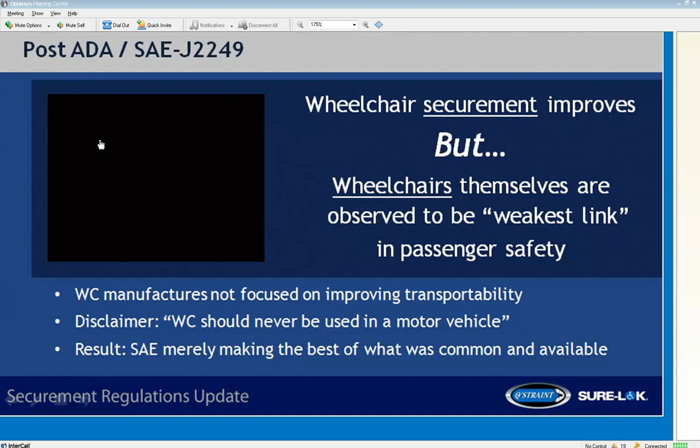So in essence, what you were doing after ADA and SAEJ 2249 is taking a strong, crash-tested securement equipment and attaching it to a wheelchair that wasn't crash-tested, regulated, or even designed to be transported to begin with. So in many respects, as great as ADA and SAEJ 2249 were, they were really making the best of a less-than-ideal situation. As a result, it wasn't uncommon in the event of a collision to see something like you'll see in this video, where you have a wheelchair that remains secure, but ends up breaking or coming apart in the event of a crash.

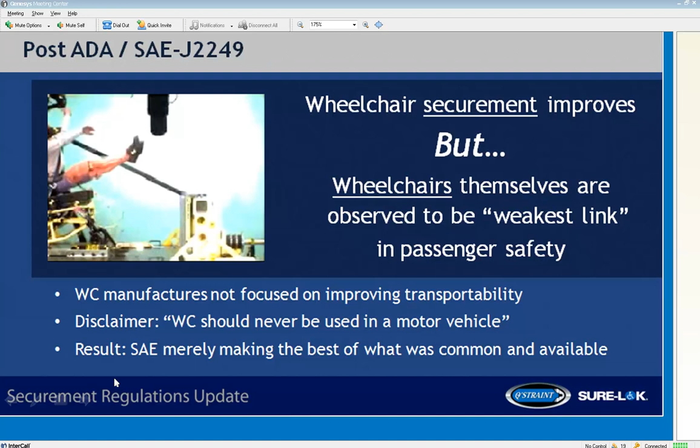Recognizing this issue, recognizing the disconnect between strong securement systems and chairs that weren't designed to be transported, another organization, the American National Standards Institute, an umbrella standards organization that oversees a number of standard-making bodies across a wide range of fields and industries, worked together with RESNA, the Rehabilitative Engineering and Assistive Technology Society of North America, to pick up where SAEJ 2249 left off, and research, develop, and publish necessary standards for stronger, safer, transit-ready wheelchairs. The goal of their research was to develop a complete wheelchair transport system, where wheelchairs and securement equipment were designed to work together seamlessly.

In 2000, four years after SAEJ 2249 was published, ANSI RESNA publishes WC19, a standard this time aimed at wheelchair manufacturers. It regulates the design and testing of wheelchairs meant to be used as seats in a moving vehicle. It's a voluntary standard, so wheelchair manufacturers weren't obligated to design transport-ready chairs, but it provided a set of benchmarks for them to meet in order to certify that their chairs were transport-ready chairs.

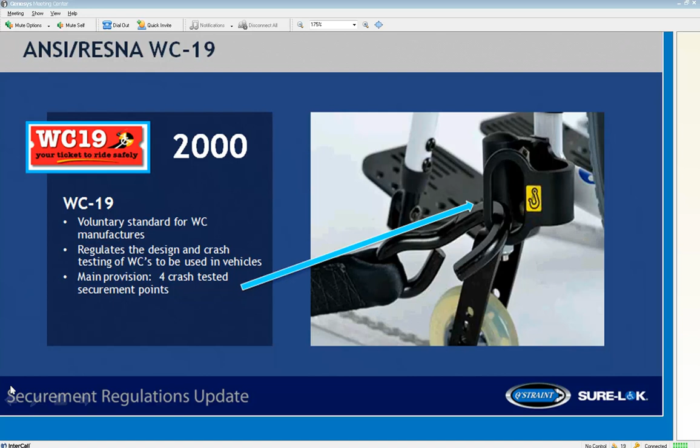It took a long time for WC19 to gain momentum, and those type of chairs have remained obscure for a long period of time. So what happened? I think there are a number of different reasons why WC19, which was published in 2000, didn't solve the problem as quickly as ANSI RESNA would have thought.

I think probably the main reason is that wheelchair manufacturers themselves were slow to modify their wheelchairs because of the added expense of design, engineering, and testing those chairs to meet those requirements. Working for a wheelchair securement company, we can tell you there is a ton of expense that goes along with crash testing and engineering products to meet these standards. And not every wheelchair manufacturer jumped on board quickly and started making WC19 chairs. So that was certainly one reason.

But one of the other reasons was that because those chairs cost more to make, that cost was passed along to the public. WC19 chairs are more expensive than a traditional wheelchair, costing anywhere from $200 to $500 more. So there was certainly some reluctance on the part of the public to purchase WC19 wheelchairs and spend that added money at the time of purchase.

But I also think there was just a general lack of awareness that these chairs were out there and available. So I'll tell you guys a quick story. I did a 2-day training at a nursing home facility in Massachusetts, a very affluent nursing home facility.

After the first day of training, we covered WC19 chairs and how to secure them. One of the administrators came up to me on the second day and said, after you talked about WC19 chairs, I did a little research, and all of our residents are eligible to receive a WC19 chair, and it's covered by the health insurance we require them to have as a resident at this facility. I said, that's great, securement should be really easy for you guys if you were seeing a lot of these chairs. The administrator told me, yeah, it should be, but we have 1,000 residents here, and we don't have one WC19 chair. So even in instances where these chairs were available and were not an additional cost to the public, I think there was just a general lack of awareness that these chairs were out there.

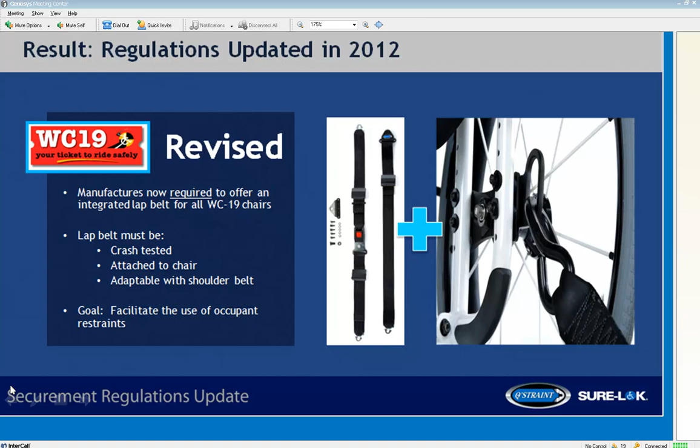In the wake of those changes to WC19, and WC19 being required by the VA and gaining popularity, RESNA decided it was also time to go back and take a look at SAEJ 2249, the standard governing wheelchair securement equipment. At that point, SAEJ 2249 was 16 years old, and a lot had changed in wheelchair transportation since then. After reviewing it, in December of 2012, RESNA released a new, revised, updated, legally recognized best practice standard for wheelchair securement equipment, called WC18, to complement the WC19 regulation governing wheelchair manufacturers.

In many respects, WC18 isn't all that different in terms of requirements from SAEJ 2249. We're still required to pass a 30-mile-an-hour, 20G frontal crash test with a 185-pound surrogate wheelchair and a 172-pound anthropomorphic test dummy. But there is one really critical distinction: we are now required to pass that crash test with a WC19 integrated lap belt.

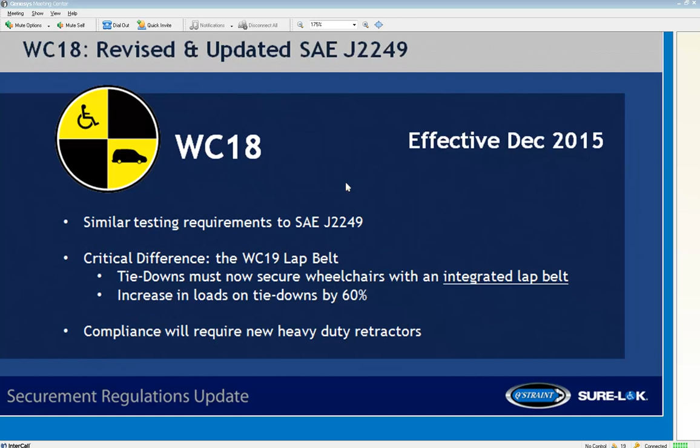To give you guys a quick overview of this change, I'm going to show you a brief video created by the University of Michigan Transportation Research Institute, who helped develop and test these new WC18 standards. In the video, you'll see Professor Larry Schneider talk a lot about these standards. He's currently chair of the SAEJ 2249 subcommittee and was incredibly influential in developing the new WC18 standard I just talked about. So I'm going to play the video.

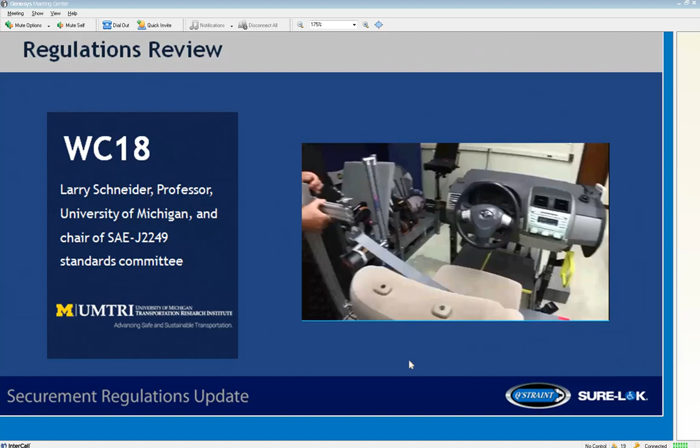Our biosciences research group is all about occupant protection for everybody in motor vehicles. An area that we're specialized in is people with disabilities, people who use wheelchairs for mobility, and particularly people who cannot transfer out of their wheelchair when they enter a motor vehicle. So they have to sit in the wheelchair when they're traveling in a motor vehicle, whether it's a van, a minivan, a paratransit van, a school bus, or even a large city bus.

One of the main tests that is run for all the standards for wheelchairs or tie-downs and restraint systems is a sled impact test, where we can simulate the crash event that would occur in the real world. So I run the sled lab here at UMTRI. The testing that we perform here is typically 30 mile per hour delta V, which is a pretty moderate to severe crash.

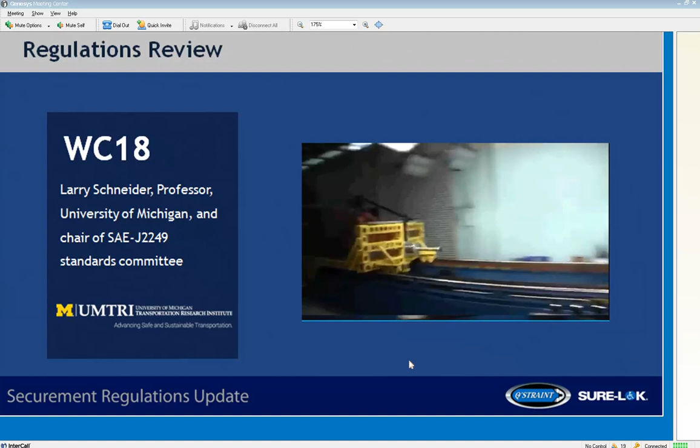We test the tie-downs and restraint systems, and we test the wheelchairs and wheelchair seating systems to the standards that have been developed by RESNA, as well as standards developed by the International Standards Organization, which are comparable and similar to the standards we have from RESNA. RESNA is a recognized standards development body that sets guidelines for industry so that the people who use them will be safe and so that those products will perform effectively.

The tie-down systems that are out there today have been used for years and years, but they may not meet this higher standard that's required by WC18, WC19. One key thing about WC19 for wheelchairs used as seats in motor vehicles is that it has 4 easily accessible securement points, or brackets, for attaching 4 tie-down straps. It's really adaptable to a wide range of wheelchairs, and it's the only system adaptable to wheelchairs of different types and models.

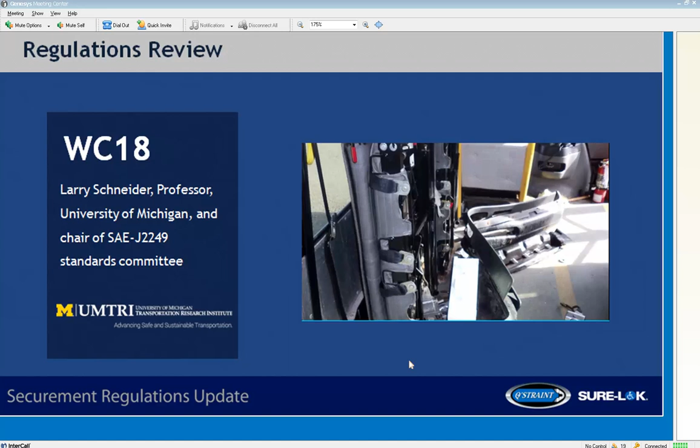For the past several years, we have been trying to investigate as many real-world crashes and even non-crash events where a person was seated in a wheelchair and something happened, the wheelchair tipped over, or there was a minor crash. What happened to the person in the wheelchair? What happened to the wheelchair? How was the equipment performing?

And we learned several things from that. One key thing was that people were being injured in many crashes, and even sudden stop non-crash events, coming out of their wheelchair because they did not have an adequate lap shoulder belt system, or because they were using a lap shoulder belt where the wheelchair structures and components, particularly the arm supports and wheels, were interfering with the proper positioning of the lap belt that was anchored to the vehicle floor.

We had previously a test for accommodation of wheelchair vehicle-anchored lap shoulder belts, but it was only a matter of testing and disclosing the results. There was no pass-fail to that. You could get a poor rating and still comply with the standard, and that just didn't make any sense.

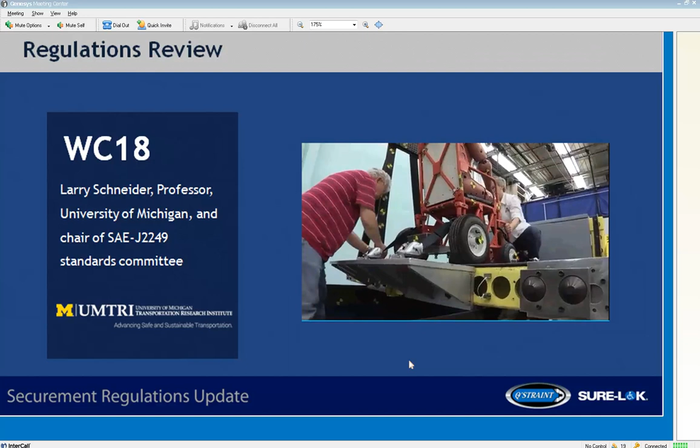So one of the things we did in WC19 was make that a pass-fail requirement. The WC19 standard now requires a wheelchair-integrated lap belt included on those wheelchairs, which provides for a much better belt fit onto the pelvis of the individual, so we don't have to worry about belts going over armrests or other wheelchair components that would interfere with proper belt fit.

This added requirement in WC19 now adds the occupant weight to the system that needs to be secured to the floor, which puts a lot more loading on the tie-down system. So one of the things we decided to include in the new version of WC18 is a higher strength test requirement for tie-down systems.

Tie-down restraint manufacturers will need to test their tie-down system or securement system with the surrogate wheelchair that we use to load tie-downs in the WC18 test, and with a surrogate lap belt anchored to that wheelchair securing the dummy to the surrogate wheelchair. So those rear tie-down straps are going to have to take a lot more load because they're dealing with occupant loads.

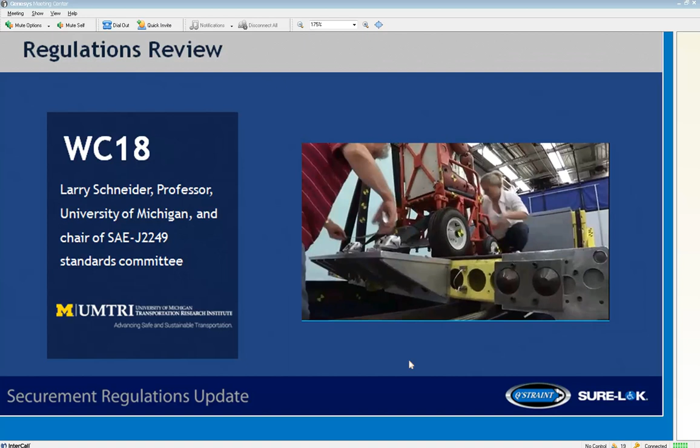These components added to tie-down systems meet the WC18 requirements, and they provide an added level of safety so that the system can behave more like the vehicle seat would behave.

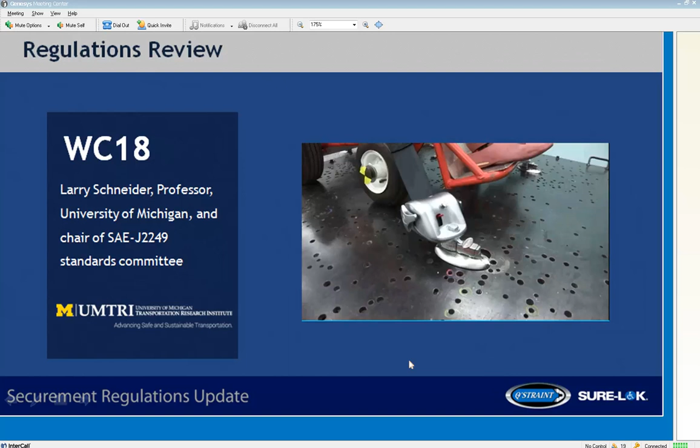Transit providers need to be aware of these standards, and that there are products that comply with them. They need to know these standards exist, and they need to install and purchase the latest versions of this equipment, because it has improved tremendously over the years. Tie-down restraint equipment has gotten much more usable; the designs have improved, so they're much easier to use, especially if you have a WC19 wheelchair with 4 easily accessible securement points.

Okay, so what do these changes in regulations mean for your customers?

I think there are really two big takeaways here. The first is that their lives as transportation providers are really going to greatly improve as these standards take hold. They're going to start to see more WC19 wheelchairs that are safer and easier and quicker to secure. All they'll have to do is attach the hooks to those anchorage points, add the shoulder belt, and they're done.

There's going to be no more fussing with occupant restraints. They're going to have a system where the wheelchair securement equipment and the wheelchairs are designed to work together seamlessly. That means their ridership will be more likely to want to use the occupant restraints, and their drivers are more likely to use them correctly. All in all, there's just going to be a lot less liability associated with transporting wheelchair passengers and attaching to the correct attachment points in the chair and using the occupant restraints correctly.

Transportation in general, and transporting wheelchair passengers, will never be liability-free, but we are really going to get as close as we can to truly worry-free wheelchair transportation. So that's the first big takeaway, that this is really going to improve life for transportation providers.

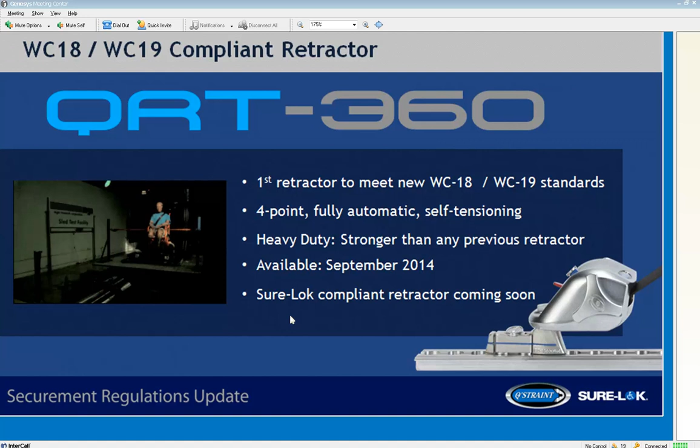MGA Research is a safety company. If you name it, if there's a safety regulation, MGA does something with that. The industry has some standards in place to make sure that individuals in wheelchairs are as safe as any other passenger in the vehicle if a crash were to happen. So specialty fasteners and tie-downs are used in these vehicles for special needs to make sure that in the case of a crash event, that person would be safe.

So today we're testing the wheelchair tie-down restraints themselves, and we're testing ones that are hopefully going to comply to this new portion of WC18, which will include a pelvis belt that's mounted to the chair itself instead of through a separate load path down to the vehicle floor.

We were able to provide this product today. It's known as the QRT 360, and it's one of the products that we're going to be introducing into the market that fully meets the WC18 requirements. WC18 and WC19 are sort of the new take on what we'll call the classic SAEJ2249 standard.

SAEJ2249 has been around for a long time, and a group called RESNA decided they were going to modify it a little bit, make it more practical, and recreate it for not just the wheelchair tie-downs, but actually the wheelchair anchorages themselves.

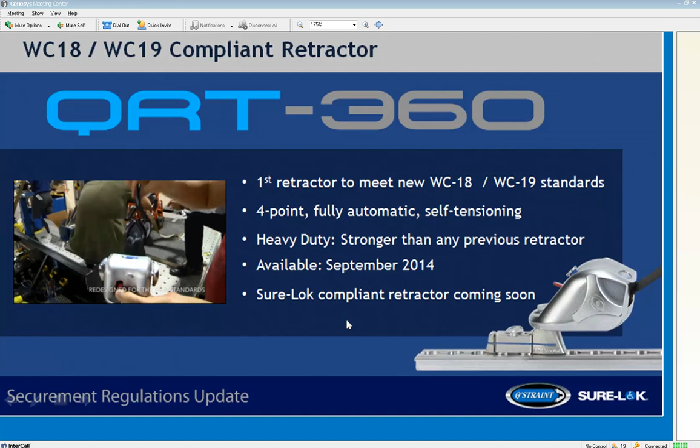To achieve the requirements to meet the standard, with the load requirements being almost double, we had a few things to design and develop. One was the webbing, which had to meet the 12,000-pound load. The second was designing the retractor that can take in the webbing and successfully retract it and release it as needed.

In WC18 to 19, what we're looking to do is test a specific item. At WC18, we're just testing the wheelchair tie-down, which means we want everything else in the test to be significantly stronger than the item being tested. We want it to be what's called infinitely rigid, which gives us a worst-case scenario on the item to be tested. So we have a rigid wheelchair and rigid anchor points all around the vehicle.

In order to pass the test, after it goes through the 30-mile-an-hour, 20G force, you have to be able to see the unit and notice that nothing has detached. The wheelchair has to be in an upright position, the ATD still has to be seated and upright, and you have to be able to disengage all the anchorages without the use of tools.

The WC19 wheelchair is going to be a brand new thing. You're going to see them in passenger vans that are usually retrofitted for mobility products, and you'll also see them on public transportation like buses and trains.

With the WC19 wheelchairs, having an integrated lap belt allows the person in the wheelchair to tie themselves in on their own. One benefit is the operator has one less thing to worry about — all he needs to do is anchor the tie-down to the wheelchair and hook the shoulder belt to the occupant's lap belt to secure the occupant.

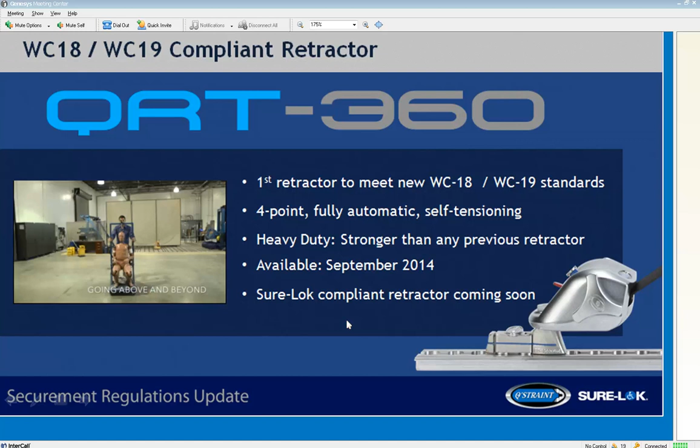That's a lot of what we do. There are what we call minimum performance standards, but a lot of companies choose to do due-care testing, going above and beyond. Definitely OEMs and manufacturers should look at the new recommendations as well as their suppliers. We want to always be ahead of the ball. These new standards are only meant to help improve the way these tests are performed, so to avoid them and not pay attention, we're not surprised by the consequences.

We tested the QRT 360 and performed two complete tests — the first with the lap belt anchored to the floor, and the second with it anchored to the wheelchair itself. In both cases, we passed the tests.